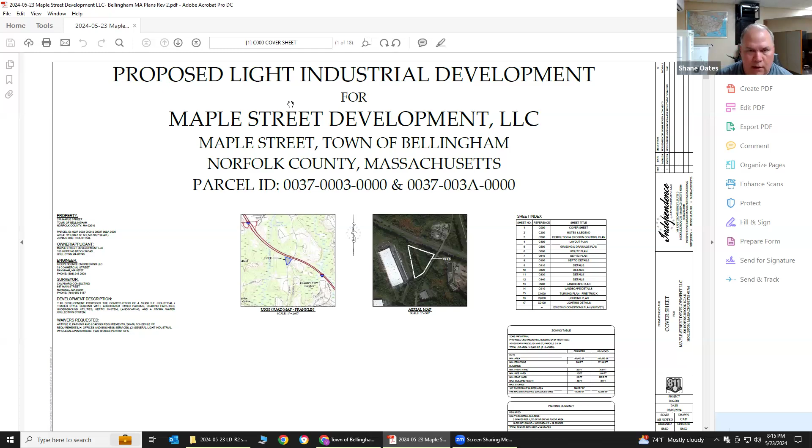We're going to get plans to the peer review engineer and hopefully start working with them at the beginning of next week. First off, just wanted to remind the board, I touched on it briefly in April, but we will be requesting one waiver for a reduction in parking. The required parking based on square footage of our building and use is 38 spaces. We are proposing 27 spaces total. To be quite honest, based on the anticipated tenants, that will be much more than they'll need, but that's what our current layout allows us to do. So just that quick reminder.

So just going to go through the plans where some revisions were made for everyone to see. The first one, which was a result of comments from the fire chief regarding emergency vehicle access around the building, our building has shrunk a little bit from 19,525 down to 18,960. What necessitated that change is a couple of items. The first of which you can see here, the access ways. These are still one way in. Now it's 20 feet as opposed to 15, and 20 feet coming out as opposed to 15. So that was the first change that we made.

Another change that Rob actually suggested and was concerned about was the retaining wall was basically about 1.5 feet off the property line in this northwest corner of the site. Now it's just under 4 feet, so we kind of scrunched everything together a little bit.

Now that there's almost 4 feet there, that wall will be much easier to install without worrying about encroachment into the right-of-way for Route 495.

We've highlighted bollards. I'll zoom in here a little bit too. So these are our access doors out back for each tenant.

So we have some bollards for the proposed access man doors. We have some bollards here at the small retaining wall for the loading facility, a couple here, and then there's some bollards as well. These are overhead doors for vans, small vehicle access. And then obviously we have bollards at the rear corners of the building as well. So those have been added.

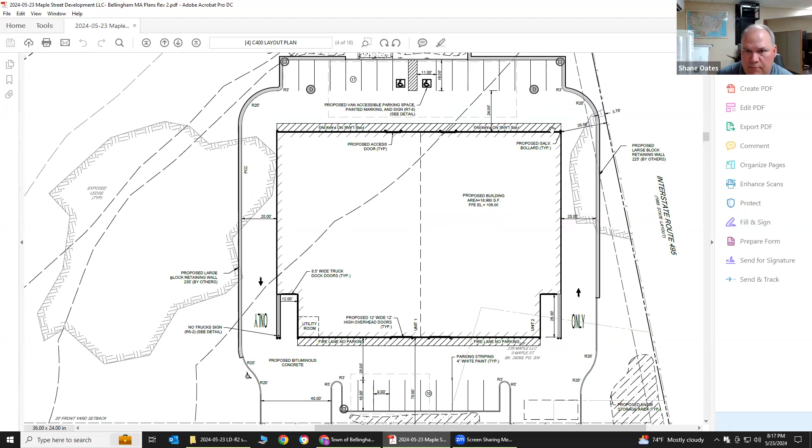Another comment from the fire chief we addressed was we've got some paint line striping, fire lane, no parking. This will keep vehicles from stopping in front or at the rear of the building.

So that was included. Also on this plan, we've done a quick analysis for sight distance. That was a concern. So this is based on proposed topography coming out of the driveway on either one and based on the topography of Maple Street.

And they're both in excess of 250 feet. So there is more than plenty proposed sight distance as a result of this.

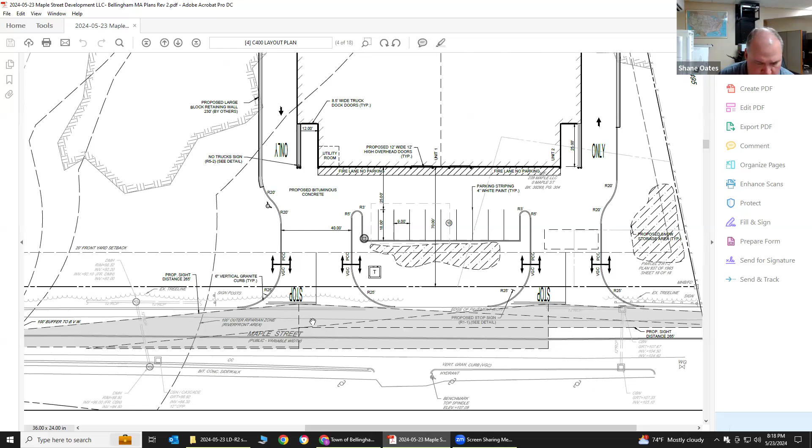So those are basically the layout changes. I'll just zoom out again. This plan was cleaned up a little bit as well.

The next plan, so what we have done last week was we went out on site per Rob's request, and we knew we would have to do it anyways. We did a couple of test holes out in the rear subsurface infiltration area.

And we did a second hole in the front subsurface area as well. We were able to get to the appropriate depths of suitable material, which will allow us to achieve our 4 feet separation so that we can attenuate our peak flows.

The only other change here is that we had these 2 proposed trench drains. They were routed out to the rear. We lifted this system up a little bit just because we could.

This system stayed the same, so now we are just routing those trench drains into the front Stormceptor. So again, that will have cleaning capabilities for any type of oil and sediment prior to going into the infiltration facility as well.

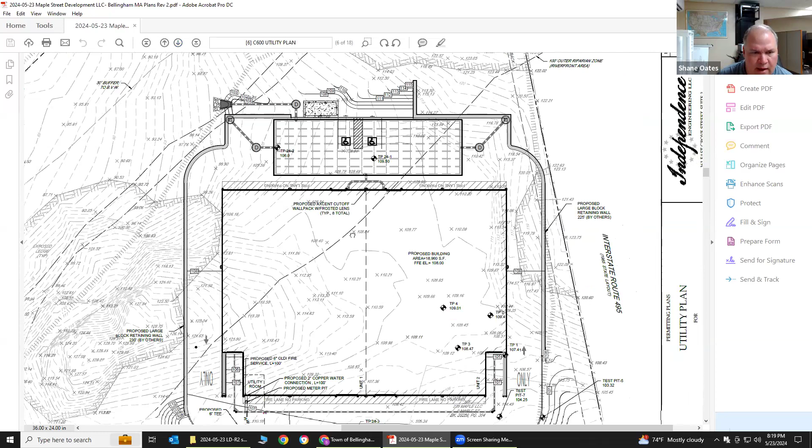As far as utilities, we have added a fire hydrant right here to the south of the site per the fire chief's request. We still have not looped the water system.

We wanted to discuss that a little bit more because these services are around 100 feet each. We're not sure that looping the system would be quite as appropriate as a much larger industrial building, but we're definitely willing to discuss that in more detail with the chief. We'll have an offline conversation with him.

The only other changes, let's see. Get to it.

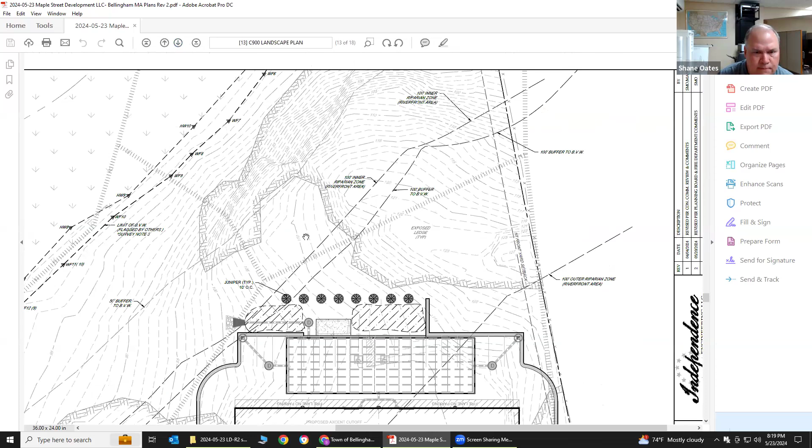So landscaping, I just wanted to touch on this again. So I had a quick discussion with Rob last week, and what we're going to do eventually, before we're done, we're going to add some more mature tree plantings here, and we're going to provide the board

with a front elevation view so that you'll be comfortable with these loading areas and the lack of visibility from Maple Street. So based on the grades, because we're coming up a few feet, coming up multiple feet here and

a couple of feet on the right side entrance. We're gonna add some more mature trees to these front landscape areas so that basically these two loading facilities will be completely screened. So that's forthcoming as well.

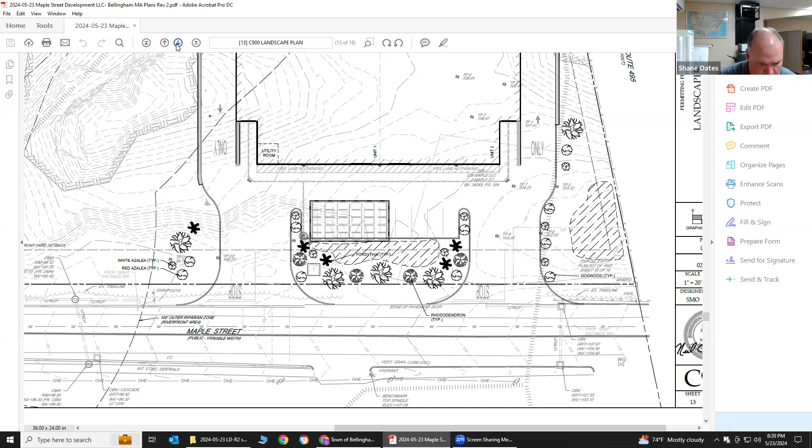And then the last change we did was we're showing our proposed wall packs / security lighting here.

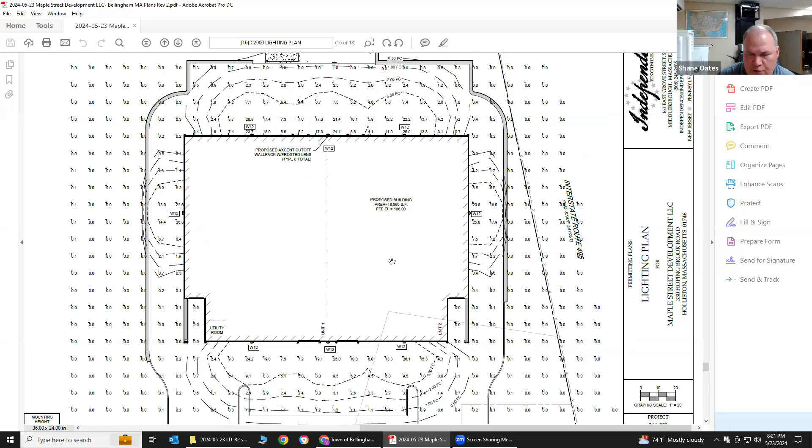And we've provided this photometrics plan as well as some contours for foot candles that show that there's no trespass of any of this lighting off-site at all.

That was basically it. That is, we think we've captured all of the board's questions and concerns from our first meeting. So if there's any additional questions, I am happy to answer.

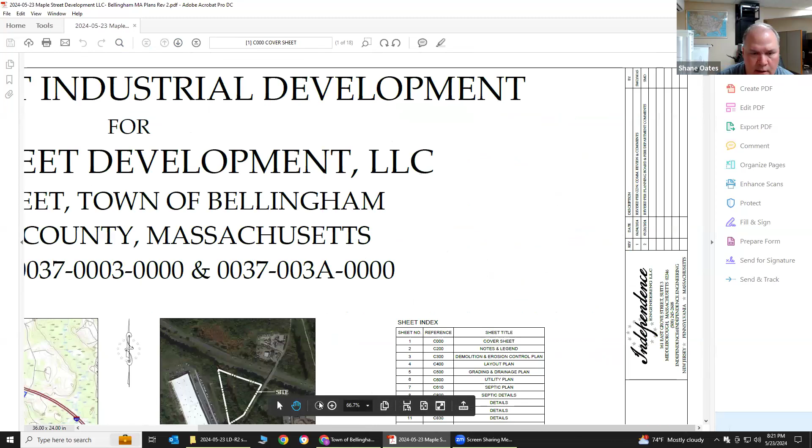I don't think we have any right now, because we've not had a chance to review this. Sure. Yeah. Fairness to the board. If the board can ask any questions that they want, I would recommend that, this is gonna be going to

peer review. That was the purpose of the edits. So it might be helpful to get the peer review done, and then we can maybe have a more robust discussion once that comes in, once everybody has a chance to even review the plans.

But I mean, it's up to the board. I have questions now, but just a couple quick points.

I would also be interested in seeing what the screening will be for the view from 495. What that might look like—maybe an elevation would help us. From 495, or to 495? From 495.

Okay, and with regard to the entrance and exits, they're both ins and outs. I'm wondering if there should only be one, in that when you come over Maple Street, over the bridge going over 495, that first entrance is going to come up pretty quickly. I understand you expanded the sight line, but if we're having ins and outs in both of those, that seems like a lot of entry points for such a small space.

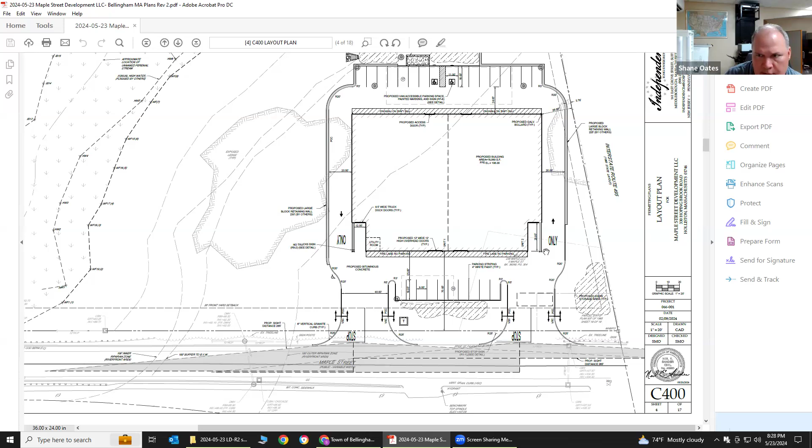Yeah, we can do that as part of the submission to peer review. That's an easy addition, that's fine. Rob, anything else you want to add to peer review besides that? No, I think the scope was pretty in-depth, so we're gonna get a pretty good peer review on this. I guess just 2 points, I don't know if the board has any other questions, but just to finish up. Something that you mentioned, Mr. Chair...

...was if we get to the point with conditions of approval, one thing I think the board is gonna have to look at, and we can talk about it as we move forward with the applicant, is that there is now a restriction on warehouses in Bellingham, and we're gonna want to look at this. It sounds like the applicant is looking to do a trades type business, which I've seen a lot, these are popping up frequently. I think we just want to be cognizant to make sure the conditions don't include any type of warehouse. Even though they're not allowed for zoning, it's still good to have a little bit of language in there.

And if I recall, we specifically asked the applicant. Yeah, and one item I want to bring up too is that I do know this parcel is right now being marketed on LoopNet as warehouse space. So, through the chair, someone brought that to my attention. I clarified with the applicant and that has since been updated. It shouldn't have been, because that was not the applicant's intent, brokers do what brokers do.

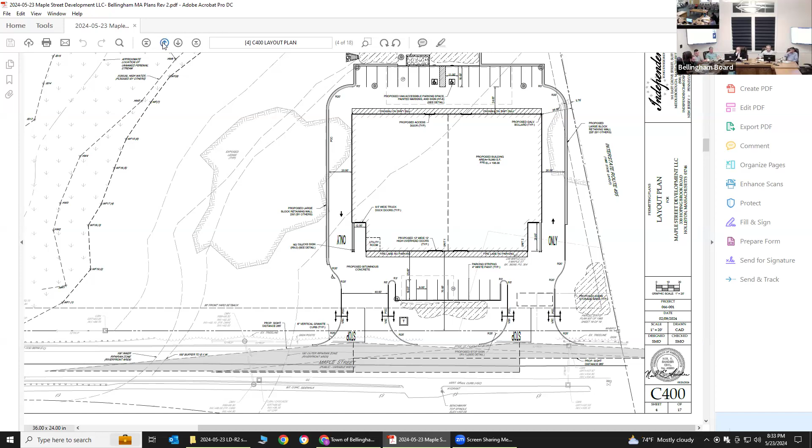Jeff Prescott, 314 Maple Street. Just a question, I guess, where is the entrance there now? Where does that fall in between the two shown on the map? I'm just curious to see where that's located.

It's right in the middle. The existing gravel driveway is right here, you can see it depicted with this hatching in the cleared area, so there's your entrances on either side.

And I would just make a comment, as far as that sight line coming over 495, I know we've already got a closer one for D and D. It's closer to 495. I'd be very concerned coming over there and having a truck either pulling out or pulling in.

I thought sightlines used to be, years ago when we were at meetings like this, we were talking 400 feet, not 250. That 250 sounds kind of short to me. But that would be a concern. On a road like this, 250 feet's probably about as long as any access driveway is off of Maple Street, from me driving it over the last few years.

Anything else in the public? Any other comments? I want to thank you for staying late, and please keep on coming.

So I think now we need a motion to continue to June 27th, and then the extension deadline, decision date, would be August 9th. That works. And I just need a signature.

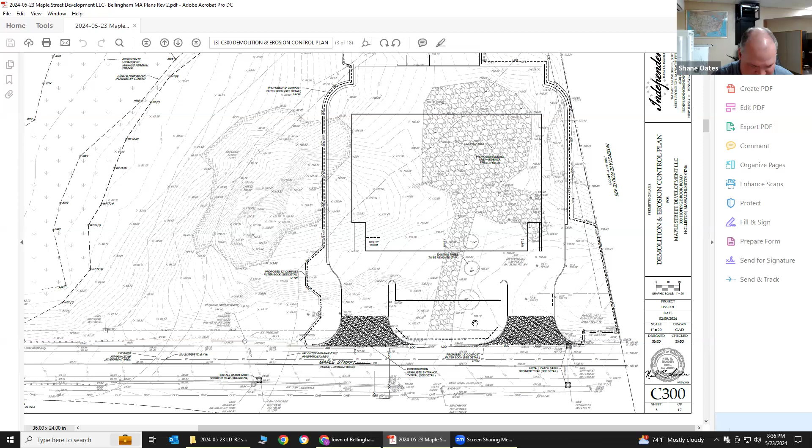So just to let the board know - okay, that's highly unusual based upon previous experience sitting here, but... We have a client who is hot to try to get going on this thing, so we're not looking to go back and forth with the board 100 times on different iterations of this plan. Our goal is to move on this thing.

So you'll get the plans to us ahead of time so that we can have time to review - our deadline is, we're getting plans for that meeting would be when? The week before. So we're going to have plans the week before.

Off the top of my head, I'm not great at math, I think the 21st. If they can't, it'll get continued - there's no harm. If they want to get it done for August 9th, but can't, we just extend the deadline again. I wouldn't be surprised if they're in July. I see your point - we've run into situations with COVID and other things where it's presented a problem, so okay.

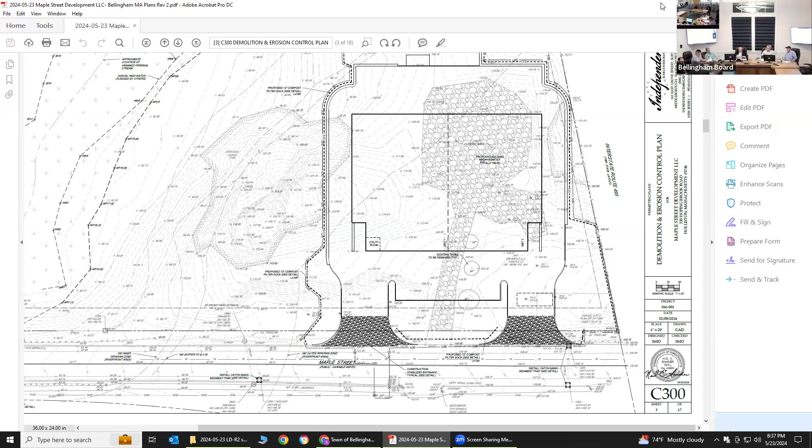If the applicant - entertain a motion on that, I'm okay with that. I'll move the motion with Robert's recommendations. Second. Any further discussion? All in favor? Brian, aye. Bill, aye. Nick, aye. The motion passes unanimously. Thank you, Robert, thank you, appreciate it.

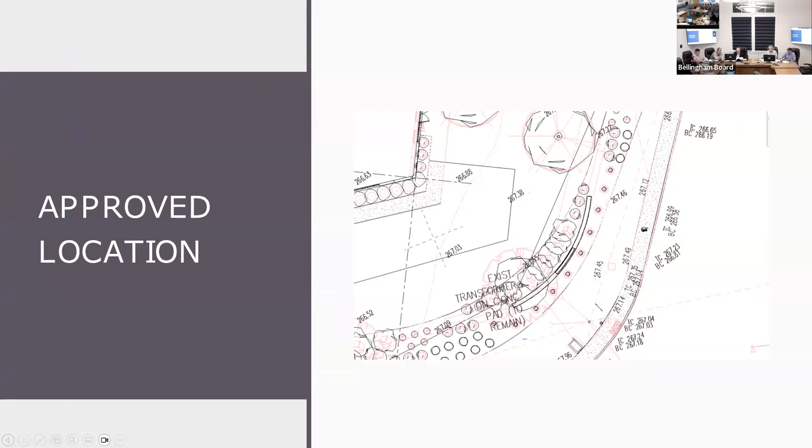Just a comment - I don't recall the color blue being called naval. It was a form of indigo. It was indigo, a swatch that said indigo. The indigo batik - is that the same one? It's similar, because indigo batik is the color of the building. And if that's how you want to proceed, we can find an indigo batik to match this color.

Can I ask you a question - sorry to interrupt. This part of the process, given the prominence of this building, and I know you guys weren't part of this: the appearance of this building, we spent hours and hours talking about what it's gonna look like, the color, making it at least aesthetically interesting in terms of depth and everything else. We're gonna have the sign positioned the right way so it looks nice, trying to make this ugly building as presentable as we possibly can. And I gotta say, this has been managed so poorly.

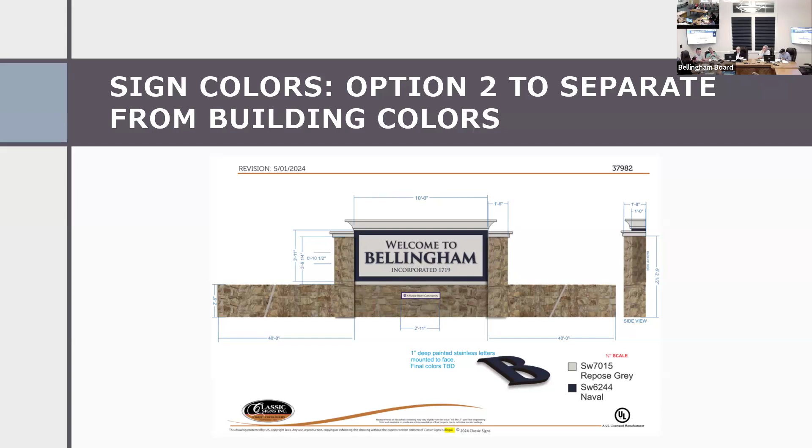Which one would be a more local stone? They're both pretty local, and I can get the name of the quarries for you. Sure, that's option one, correct? And for the stone itself, are these comparable in size, or is one larger?

One's larger than the other on site, but they would chip it down to make them smaller. We have both samples on site as well, if you guys would like to drive by and see them in person. We were told that samples were going to be presented at the next meeting.

Some of them are a little larger than the others, so it would have been a little heavy to bring in. Okay, but I would invite you guys to come out to the site. I can bring them in if you would like.

Can I offer a suggestion? Yeah, before we get into the nuts and details. It may be appropriate to do a site visit on some Saturday, once you've staked out the sign.

Because I echo comments made by the board members, we have a lot of things that can obstruct the sign - telephone pole, the base for the lights. So I think it's critical, as Nick mentioned, that this be easily viewed coming from the highway. This is going to welcome people to Bellingham. This is something we hope to replicate down the road in North Bellingham as well. So that's why it's important to us.

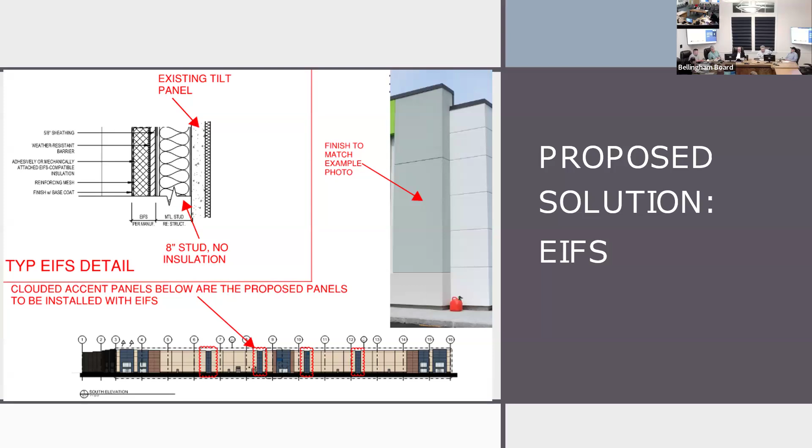Okay, so do we block in a date? Yeah, June 8th, is that the date you're looking at? Yeah, whatever time, 10 o'clock. How far are you coming from? About an hour and a half. What's convenient for you on a Saturday?

10 a.m., fine. Is 9 working days enough time to install one of those? So we have to order the studs. Yeah, the studs take about a week to get to the site and then we have to install, but I can make a call after this.

I know it can be tight, give us a day or two and we'll respond. I'd like this to be put in place. If we need to push it a week, I'd rather do that and be able to knock it out here. So let us look at the 8th, or we'll look at the 15th. Is that fair? Yeah, let us. We want it done, mocked up, and painted.

We walk out, look at it, make sure the sign's in place. It's staked out, we'll have the stone on site, we'll get the pictures. Could you let Rob know the day you're doing the mock-up? They're gonna start the mock-up, and I'd like to figure this out right now.

I would entertain a motion for a meeting on site for June 8th as the primary date, with a backup date of June 15th, both times at 10 o'clock, based on availability of the applicant to complete certain tasks. I was gonna recommend instead of June 8th, push it to June 15th to give them time to do the mock-up. We have a meeting June 13th, so we'll definitely be in contact before then. If you gotta push it back another day, we can make the definitive decision at the meeting while we're here in quorum. Does that work? Okay, June 15th, 10 a.m.

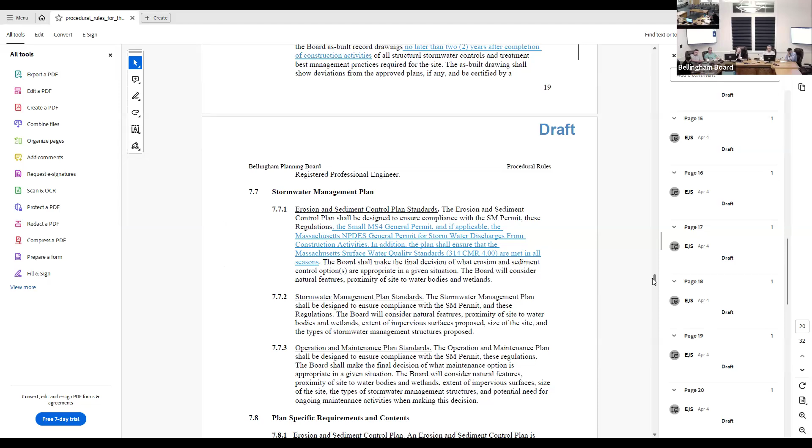If you have a moment to review this info before June 13th, we're gonna have our consultant here from Tighe & Bond, who actually helped draft these. I'm very familiar with this stuff because this is what I did before coming to the town, but we'll be able to answer any questions, and essentially what's going to be asked is the board to vote on adopting these changes on the June 13th meeting. We can push it back, but we're not really up against the clock. The EPA has basically told us that we need to update these sooner rather than later, or they might take enforcement. So we don't want that.

Yeah, and we're on the 1 yard line. It's just, we gotta present it to the board, make sure if you have any questions or comments, we'll go through it all with the consultant on the 13th. That's fine, okay, so that's that.

Okay, ma'am, do you have any questions? I do, but nothing that I think needs to be on the record. I just wanted some clarity around the project, 306 Maple. But I don't think it's anything that needs to be part of the meeting. Okay, thank you very much. Thank you for staying for all of it. Sure, I just didn't want to ignore you. Thank you, I appreciate it.

MBTA review, the MBTA overview, I had a very quick presentation, which I can hold off on for another time unless people are very interested in it. It's pretty late, so we can go to another time, just to give you an overview. But we have one last thing to do before we adjourn.